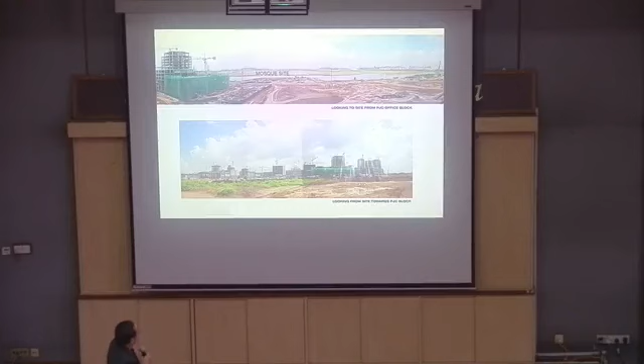They showed us this. Our clients were Perbadanan Putrajaya, so they showed us this, their office building. And when we saw it, oh, it's a very nice office building, very modern, very different from the Palace of Justice.

The concept architect is Zaini Dubus Research, or ZDR. They were the concept architects, but there are 3 implementing architects for it. I think, and the other one of them is us. We were doing the one on the right there, the convention hall. The auditorium was done by, I can't remember who. Anyway, they showed us this and we were impressed by it. I mean, it's a very modern building. Okay, fine, that helped us a lot.

Then they showed us this.

And when we saw this, we were like, alamak. I mean, this is an artist's impression, but it tells a lot, this picture. It tells a lot about what people think a mosque should look like. It's a very traditional looking mosque you can find anywhere in Malaysia.

In a way, this picture tells us a lot of things of what we should or should not do. So we took this cue, and then we saw the Perbadanan building, very modern. So let's see, we'll do something different. We're not going to do this. Putra Mosque is already quite traditional, so let's do something very different.

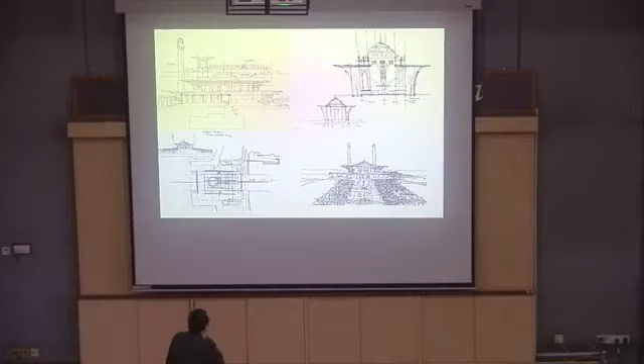That fit well with what we had to do. Basically, we had to do somewhat a naturally ventilated mosque, and also it had to be open. How do we achieve this? Basically, the clouds in our mosque is the roof, the big roof that spans across the main prayer hall, those are the clouds.

Transparency is another idea related to this openness of the building. Why transparency? Basically because we as humans can't do anything without Allah subhanahu wa ta'ala knowing. He will know everything that we do in a room, behind a curtain, downstairs, upstairs, in a car. Allah subhanahu wa ta'ala will always know. You may not tell anybody, but He will always know. So in that sense, we are always transparent, He can see right through us. That idea of transparency goes well with the open nature of the building.

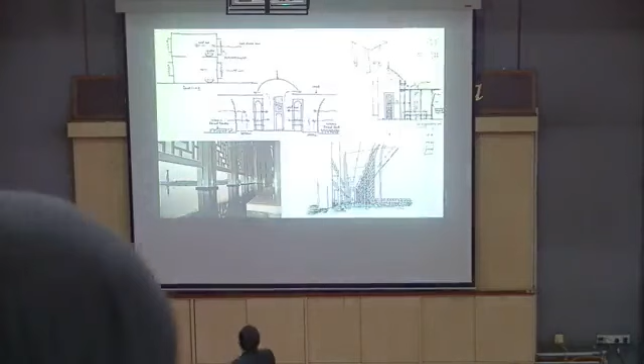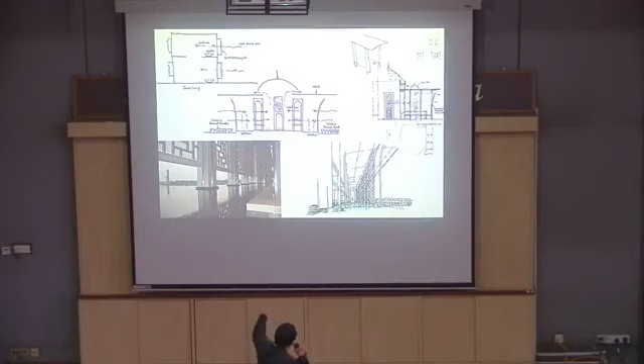These are our early sketches also, and in desert dwellings, you know, when the hot air goes through the mashrabiyah - correct me if I'm wrong - people put water at the window so that the air comes cooler. So that is basically the concept to have the water body around the main prayer hall. Not just that, at the end of the day, the water body also acts as a rain catcher, so to speak, because it's an open mosque. We know the wind is strong, but we don't know how far the wind will carry the water in, actually. So we allow a space of about almost 12 meters, that water body.

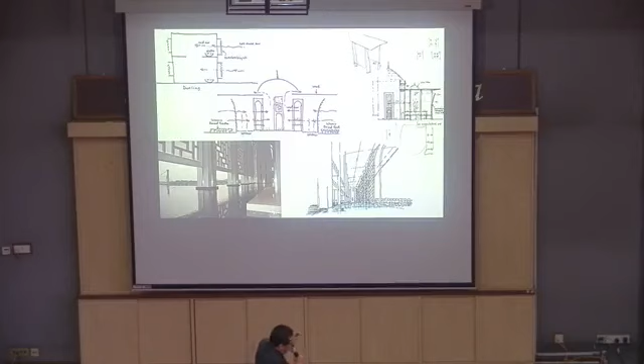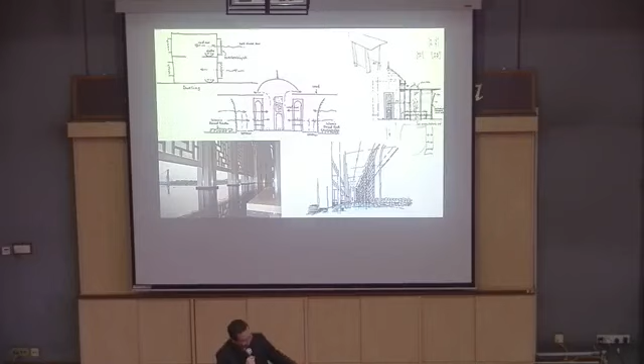It works well. I didn't explain earlier because when we were starting, somebody, I can't remember who it was, raised the idea of, can we have another mosque over water? I don't know why people are so fascinated with that. But we can't, because our site actually, the front of the site had a promenade, which is outside our boundary. So actually essentially it's not a mosque over the water, it's a mosque by the water, yes.

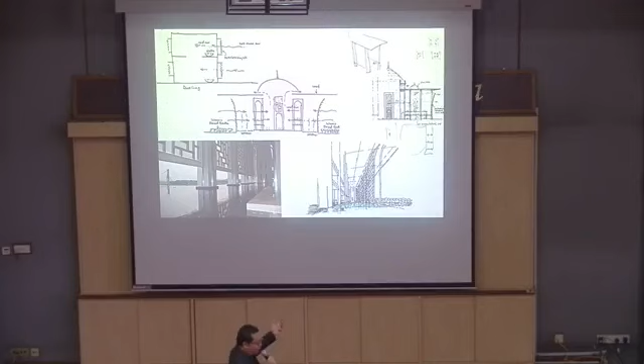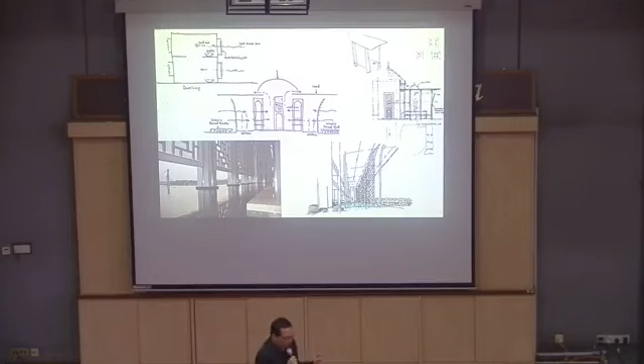But by having this water body around the main prayer hall, our pond and the lake become seamless. It becomes like the lake comes into the mosque. With the infinity edge pool, we managed to achieve that, and I think a lot of people admired that. In fact, after a while, we were asked to close down the edge because people kept falling off into the pool, since they're not concentrating.

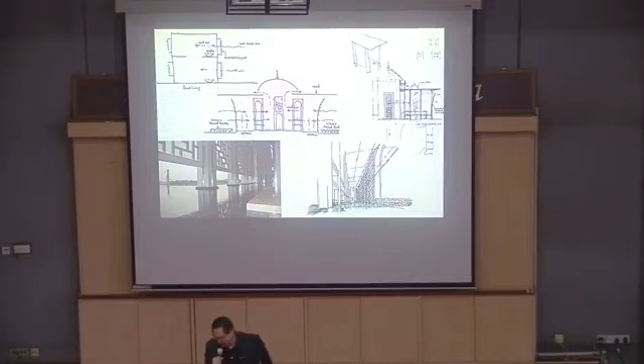Islam as a progressive religion - we wanted to portray that as well, because this was in 2002, about a year after the fateful 9/11 events. At that time, the whole world was looking at Islam in a negative way - Islam is backward, Islam is barbaric, all these things. But Islam is actually a beautiful religion.

The Quran, what's in the Quran, is actually adaptable through times. Thousands of years ago and thousands of years in the future, it will be adaptable. So how do we achieve this?

In the Quran there is a verse, Al-Hadid 25, which basically says we send down iron, in which material is used for war and many benefits for mankind. Steel is a subset of iron, so steel, the material, is mentioned in the Quran. So it's something we could use in our project, and I feel that because it's mentioned in the Quran, it's good to try and use it as much as you can.

But that was not the reason why we used steel, because I found this out later. We used steel because of constructability - to achieve that space, it's easier to use steel than reinforced concrete.

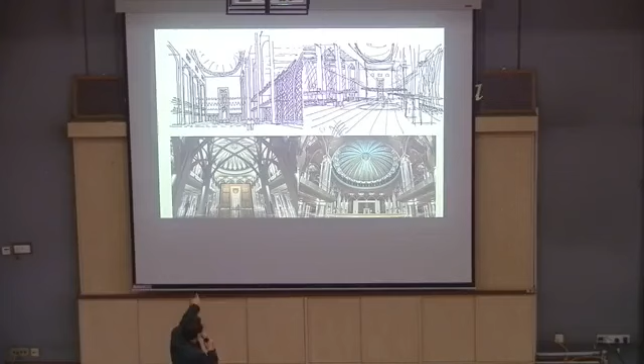That's why we brought it up - in fact, it was much higher than what has been completed. There was a phase where we had to do some value engineering, so we brought the height of the whole building down by about 10 meters or so. The left is our initial perspective, and the right photo is the completed picture.

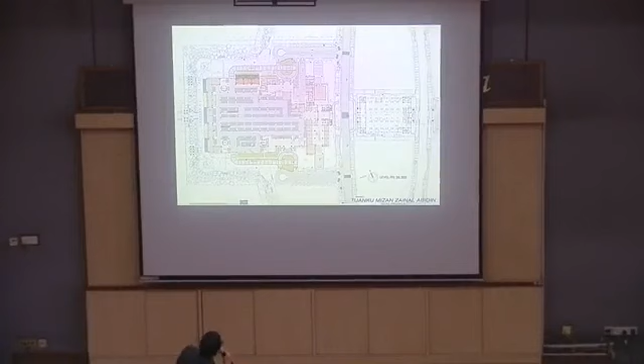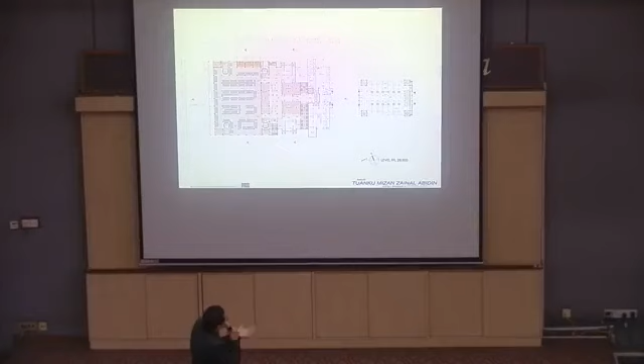Some basic drawings. As mentioned, we lifted up the main prayer hall level, so we created space below for the car parks, the retail on the right here, the function room. We have quarters as well, the Janazah room and all that, and on the Qiblat walk is all the car parks. In the middle level, level 28, is where all the wudu's and toilets are, and the first floor of the quarters.

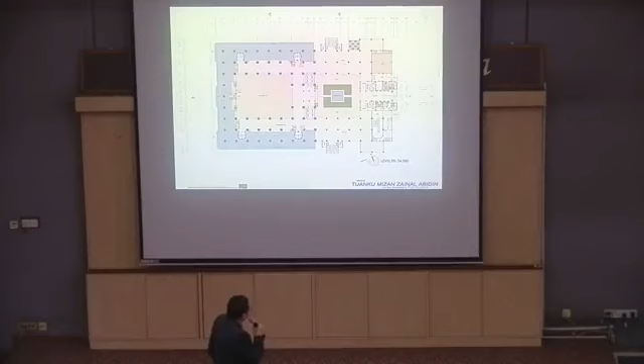The main prayer hall is roughly the same level as the Palace of Justice. So this level is just for the house of prayers, except for the front part where we have the office and visitors cloakroom. Then the upper level praying areas, and the roof.

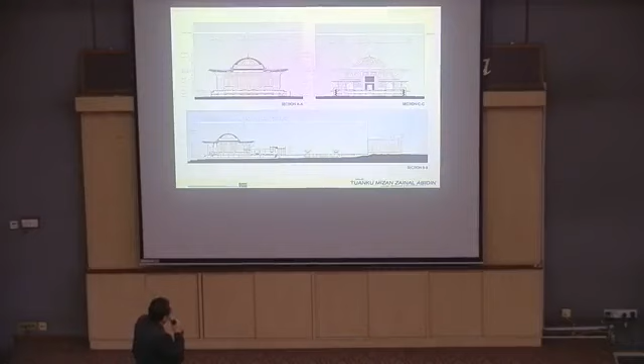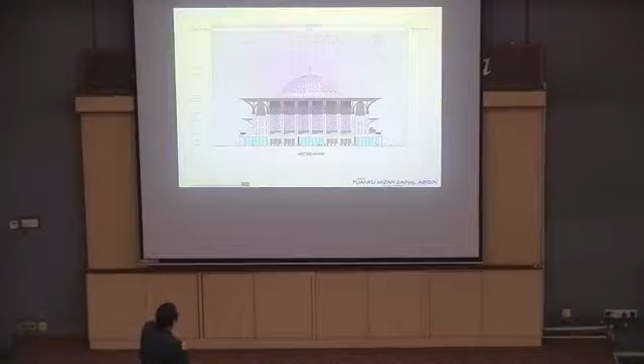The section here, the front elevation as you see as you walk from the Qiblat walk, and the lakeside elevation.

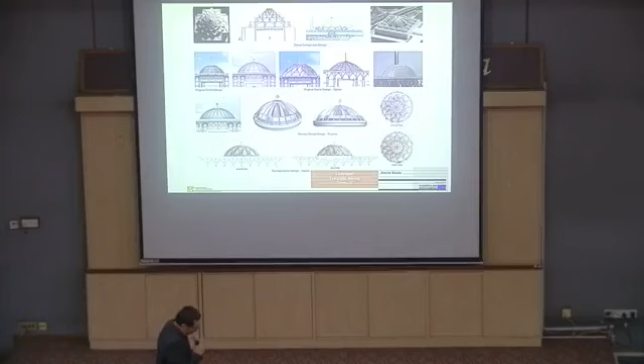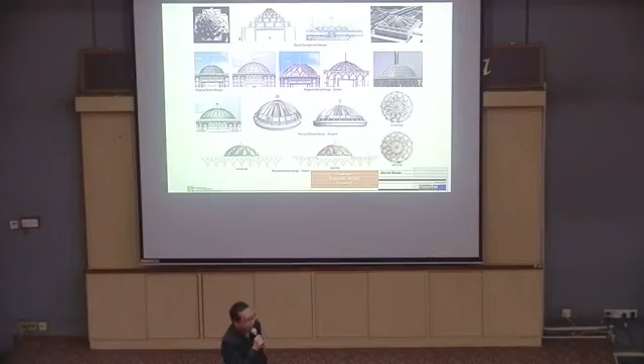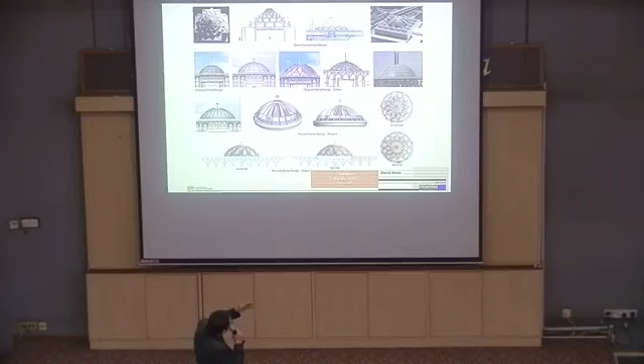Coming out with the dome design was a bit tricky in the beginning because we didn't want to do another onion dome or typical mosque dome. What was a modern dome to us then? So we did some studies - we looked at, I can't remember which mosque, the Rome Mosque on the right, and the National Mosque Kuala Lumpur. They're all quite modern. But in the end we agreed to develop the ribbed dome, the one at the bottom, second from below - we developed from that.

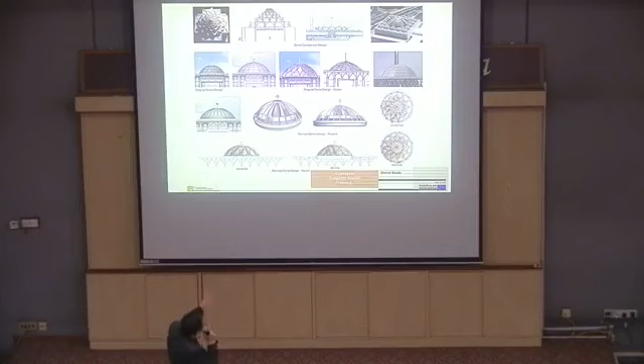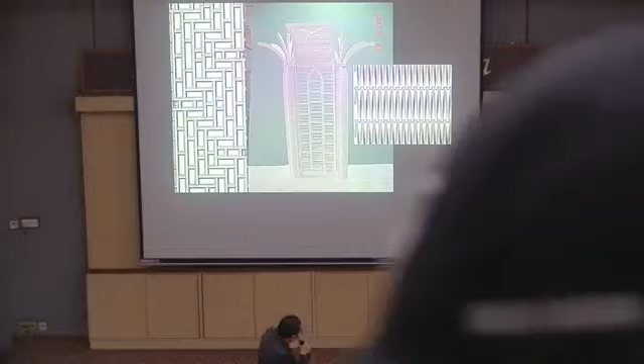So that's a model we did in the beginning, but this was the earlier model before we came out with this pattern. And that's a detail of the GKD Escale 7x1 stainless steel mesh that we used to infill behind the mashrabiyah. It's like a curtain fabric, that's what it is.